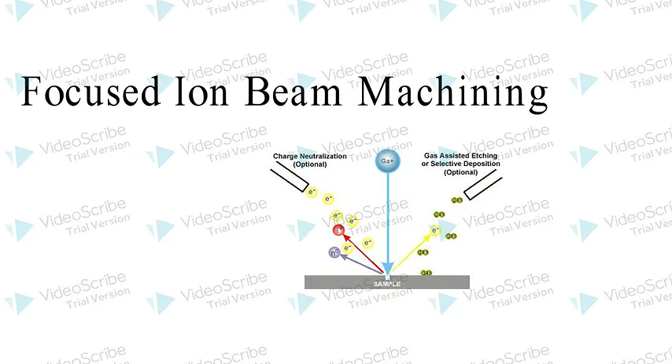This process is also known as ion milling. And why ions? Because they are nothing but atoms having gained or lost an electron, which are much heavier than normal electrons. For example, a hydrogen ion is 1840 times heavier than the electron.

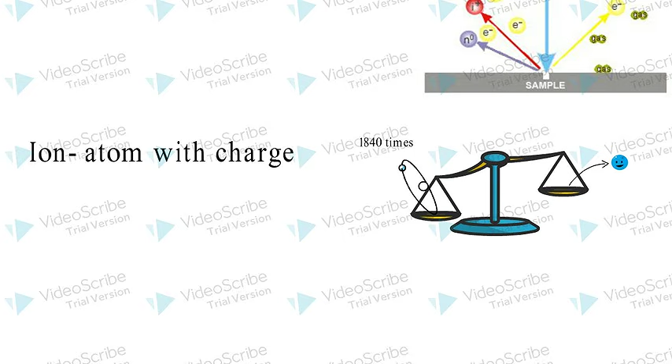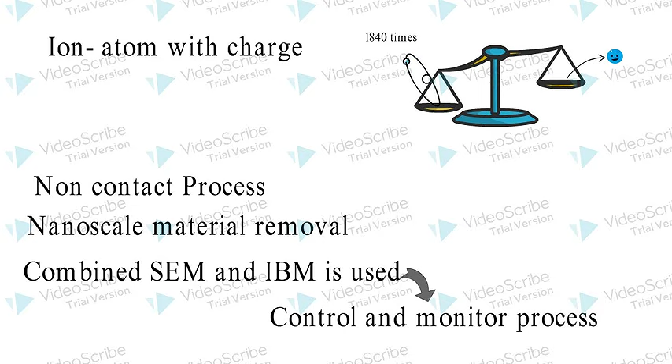So this process offers certain advantages over electron beam machining. This is a non-contact process, so the workpiece is completely stress-free and works better on nano or micro scale, so it's used for micro machining. It is also coupled with scanning electron microscope, that is SEM, which is used for imaging whatever process is going on. So imaging gives you better control over the milling and machining process. Focused ion beam machining is usually used in collaboration with scanning electron microscope.

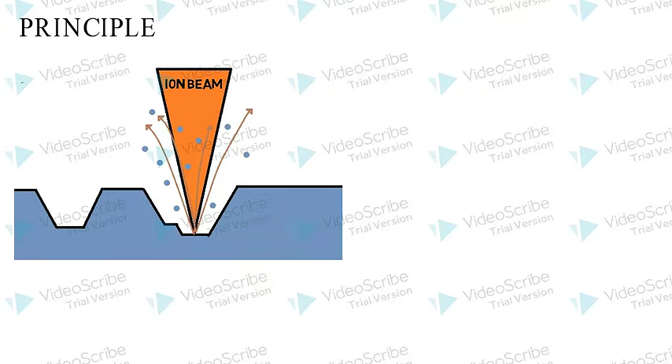Now let's see the basics of focused ion beam machining. This is the ion beam generated from the ion column, which is most of the times gallium plus ions. That is the workpiece, and these represent the atoms which are removed from the workpiece.

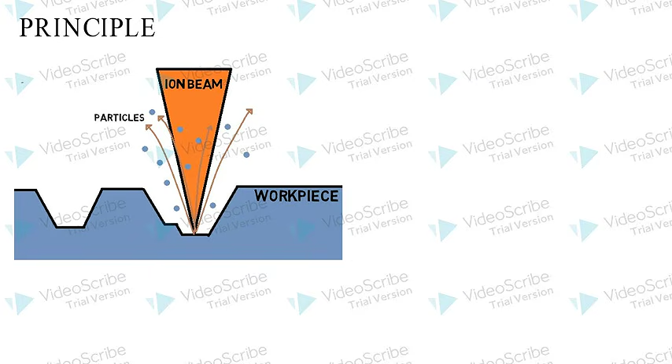So how does this work? There are certain steps involved. The first and foremost of them is surely sputtering. Sputtering can be thought of as a game of pool or a game of marbles. What happens when an ion accelerated with a high velocity hits the work surface? It transfers this kinetic energy to the surface atoms of that workpiece, and if that kinetic energy happens to be greater than the binding energy of that particular atom which it is hitting on the surface of the workpiece, then the kinetic energy counteracts the binding energy and that atom is forced out or emitted from the workpiece. This is nothing but sputtering.

So sputtering contributes to machining in ion beam machining. There is a parameter for this called sputtering yield, which is basically a ratio of mean numbers of emitted atoms to the incident particles which the ion beam contains. That gives us how much incident atoms can generate how many emitted atoms from the workpiece.

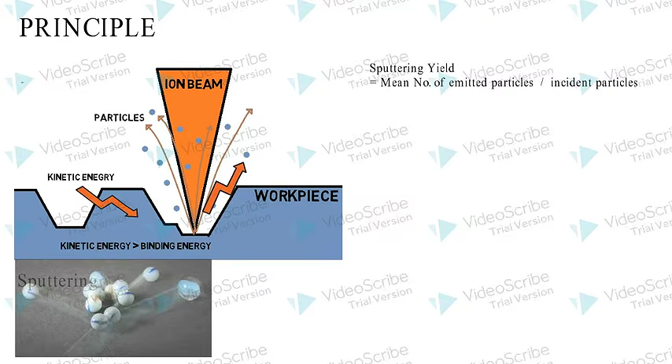Sputtering also gives rise to collision cascade. If an ion incident on the workpiece possesses higher energy, it does not only transfer that to a single atom on the surface, it undergoes a series of collisions inside the target. Each atom which comes in contact with this acquires kinetic energy. If, as in sputtering, this kinetic energy is more than its binding energy, this atom can be emitted out from the workpiece. So collision cascade can emit several atoms at a particular time from the target surface.

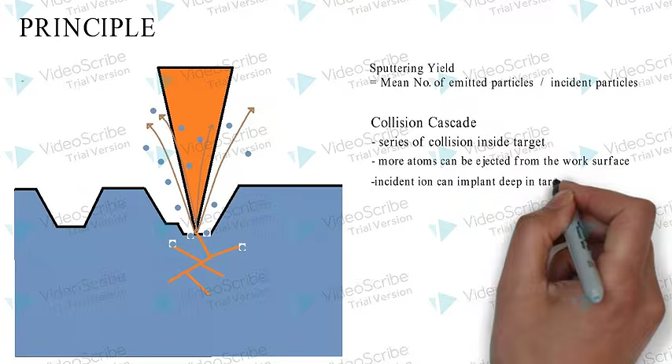Also, the incident ion can get implanted in the surface so that it can damage the crystal lattice of the target surface. The cascading effect can be accelerated by using higher energy incident ions. Cascading effect is accelerated when higher material removal rate is needed from ion milling, and though it causes some surface damage, it still yields higher sputter yield.

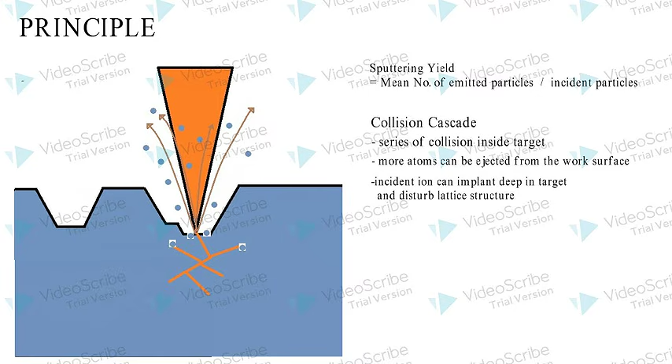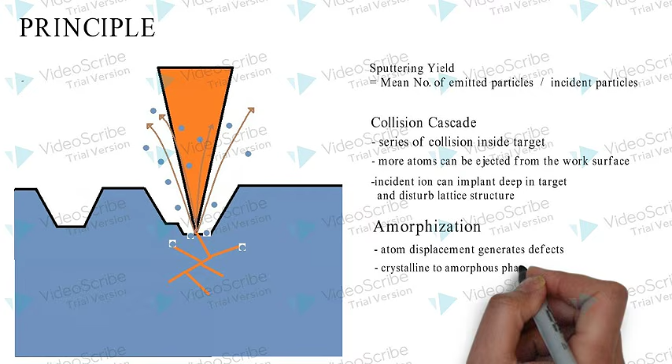As we surely know, one problem gives rise to another. If collision cascade occurs, the ions can get implanted deep in the surface of the workpiece to be machined. This can cause point defects in the crystalline structure of the workpiece, and that causes the crystalline structure of the workpiece to convert into an amorphous structure, which can be harmful at times. The depth of this is very small, 10 to 30 nanometers, but as this is a micro machining process, it affects the outcome.

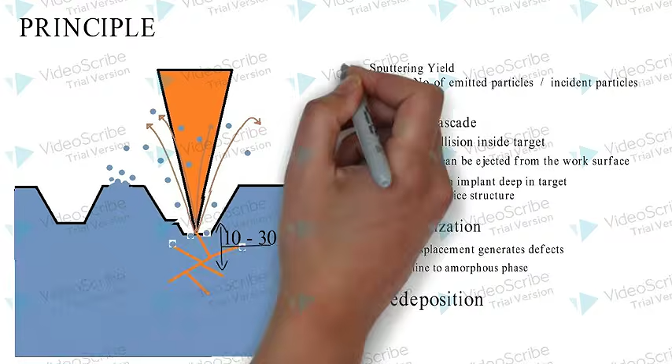There is another phenomenon observed in the ion beam machining process, that is redeposition. As this whole process is occurring in vacuum, the atoms removed by the sputtering process cannot be evacuated by the vacuum system. Sometimes they can get deposited on the adjacent surface where the milling is going on. The redeposited material sometimes settles on the site and adheres to the surface, which means we need to sputter it a second time, which obviously increases your process time and effort. So redeposition is surely an undesirable phenomenon in focused ion beam machining.

Redeposition is observed highly in areas such as holes, trenches, or narrow slots, where the redeposited material is also difficult to evacuate.

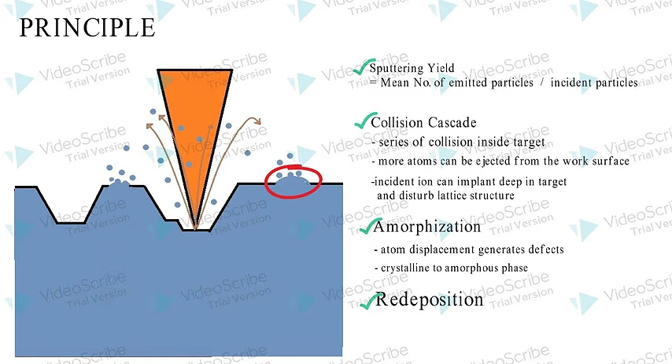Up to now, we have seen sputtering, collision cascade, amorphization, and redeposition. Although there are arguments, redeposition is surely an unwanted phenomenon in focused ion beam machining, so we need to get rid of it. That can be achieved using two methods.

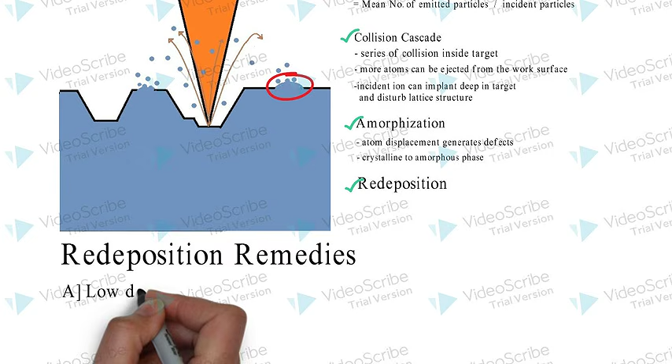The first is low beam current with multiple passes. If the incident ion beam does not have high energy, the collision cascade is minimized and therefore the dislocation of atoms inside the crystalline surface of the workpiece is minimum. But since the material removal rate in this process is very low, we need multiple passes. So lower the beam current, use more passes. That is one way to avoid redeposition.

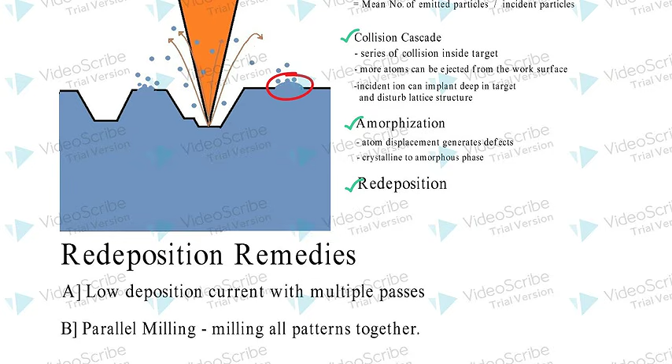The second thing which can be done is parallel milling. Parallel milling is machining multiple patterns at the same time. For example, drilling one hole after another is series milling, while drilling 15 or 10 holes on a particular surface at the same time is called parallel milling. Parallel milling avoids redeposition as all the patterns are machined simultaneously.

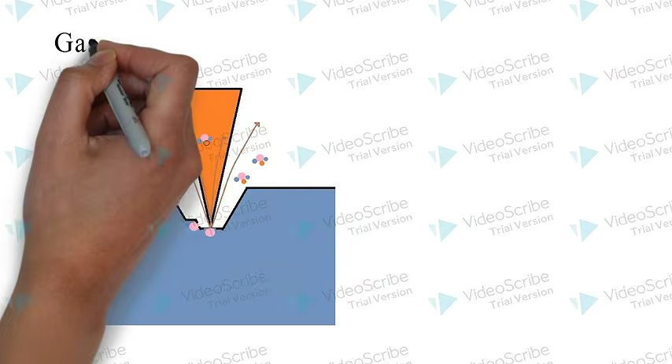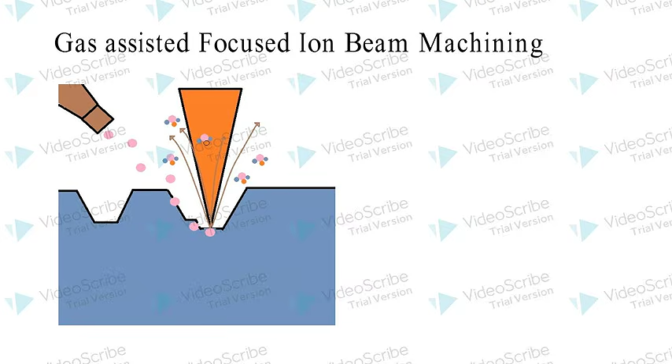To overcome both redeposition and the low material removal rate problem of focused ion beam machining, reactive gas can be introduced at the site of milling. This type of milling is called gas-assisted focused ion beam machining. So there is a GIS, that is gas injection system, in addition to the ion beam and workpiece. This reactive gas is incident on the milling site.

Gas molecules get adsorbed, that is they rest on the surface of the workpiece. When the ion impinges on the surface, the adsorbed gas atoms ionize and chemically react with the substrate surface, which helps the milling process. The compound formed can most of the time be volatile, so it is removed from the workpiece. So reactive gas deposits on the surface, reacts with the ion and the workpiece, and is removed as a volatile material. This solves the problem of redeposition, thereby increasing the accuracy of the machined feature and enhancing the material removal rate.

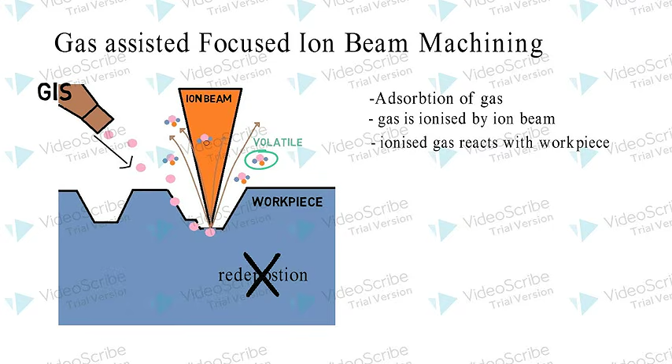So the number of gas molecules or the amount of gas injected at the milling surface is kept optimum, because if the gas is lower in amount, it will generate less sputtering yield, that is low material removal rate. But if there is excess gas, the gas atoms will directly interact with the ions and not the workpiece, so there will be no workpiece atom removal, and again low sputtering yield. So either high or low amount of gas results in low material removal rate.

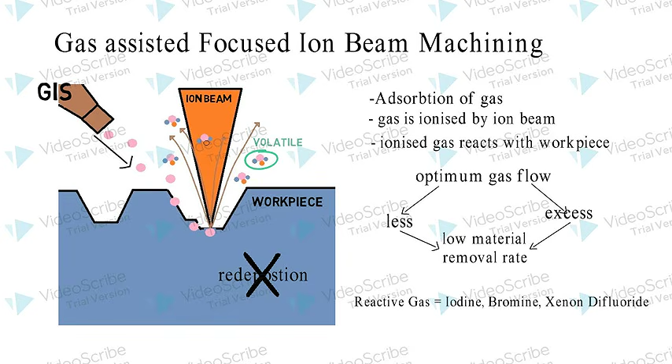Selection of a suitable gas is done based on whatever workpiece or target material we are using in this process. Generally, halogen-based compounds are used as reactive gases, such as iodine, bromine, or xenon difluoride. These are some examples of commonly used gases.

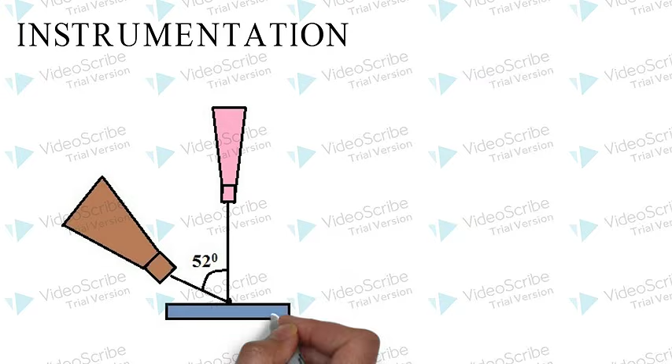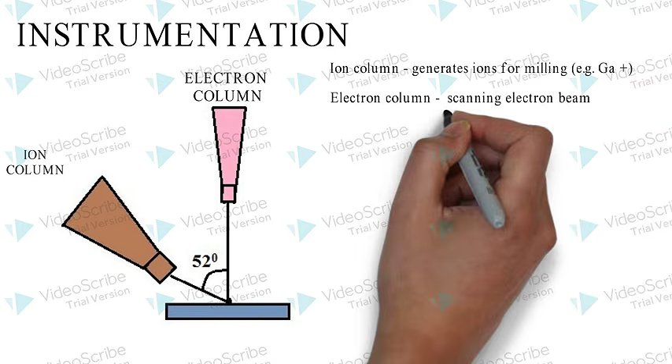Let's move on to the instrumentation of focused ion beam machining. Commercial dual beam platforms incorporate both a focused ion beam column and a scanning electron microscope column, in which the ion beam column is used to generate the ion beam for machining the substrate or workpiece, and the electron column generates a beam of electrons which can be scanned over the workpiece to get in situ real-time images for observing the FIB process at the target zone.

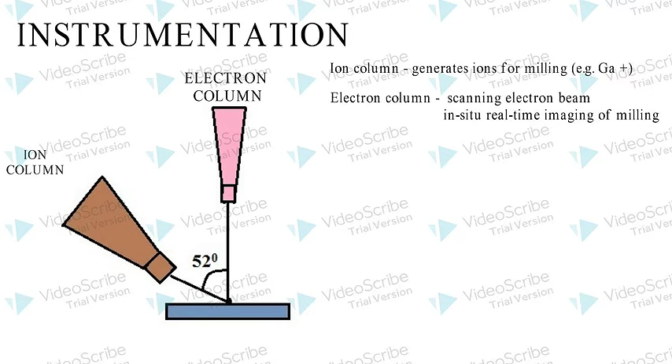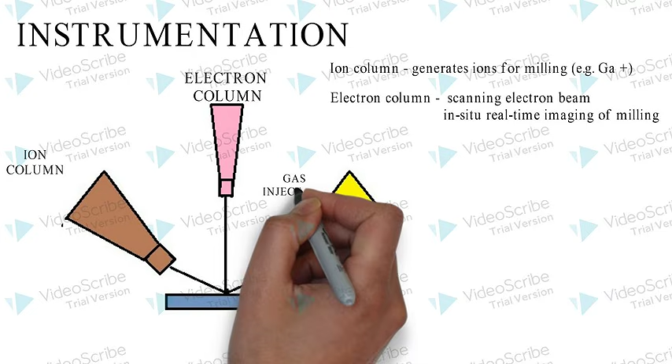Typically, the ion column is tilted at 52 degrees to the electron column so that the real-time image can be seen on the computer screen. In case of gas-assisted FIB machining, there is another nozzle in the setup, which is from the GIS, that is gas injection system.

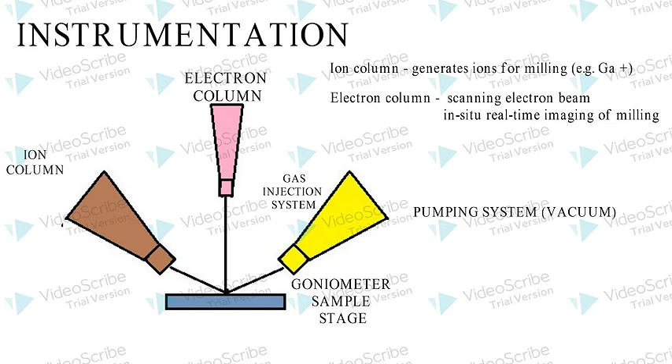The instrumentation also includes a goniometer sample stage, that is the stage at which the substrate or workpiece is held, and a pumping system for creating vacuum conditions, which is favorable for both electron beam and ion beam. So there are five total aspects: ion column, electron column, gas injection system, goniometer sample stage, and pumping system.

From the liquid metal ion source, the ions are field evaporated and forced to travel downwards. The next important part is the mass selector. It is a setup that allows only the required number of ions with a fixed mass-charge ratio to pass through it for the machining process.

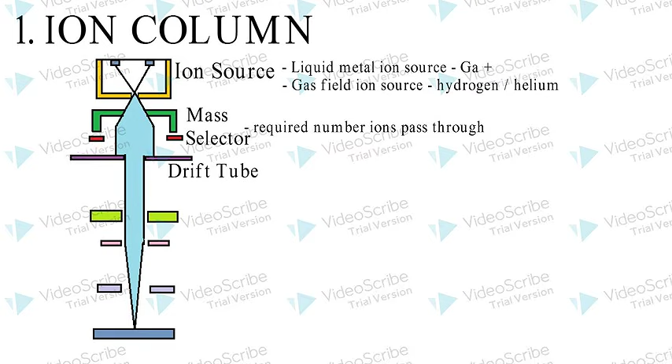Then there is an aperture or a drift tube which allows only the atoms which are traveling in a vertical direction. Then there is a set of lenses, out of which the condenser lens controls the diameter of the ion beam, that is, it can increase and decrease the size or circumference of the ion beam.

Objective lens are useful for focusing the ion beam at a single point at the sample. Sputtering occurs when these ion beams strike the sample surface.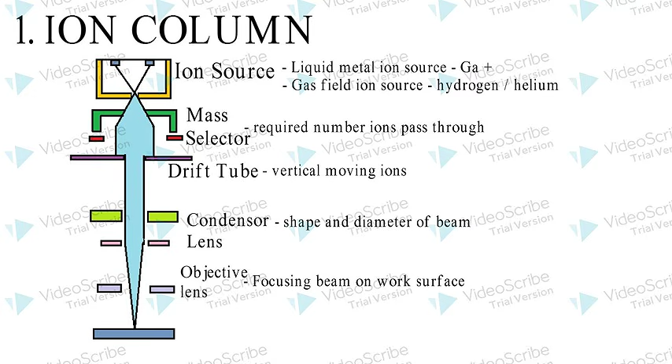Electron column is similar to ion column, also called the SEM column. The source of electron beam is kept at the top of the column, which emits electrons, and they are accelerated towards the sample. Electromagnetic lenses are used to focus this beam of electrons on the sample.

When a beam of electrons strikes the sample, the surface emits secondary electrons, and these secondary electrons can be detected using detectors which are capable of converting this electronic signal into an image.

Electron column is discussed in detail in the video on scanning electron microscope or electron microscope. So please refer to that.

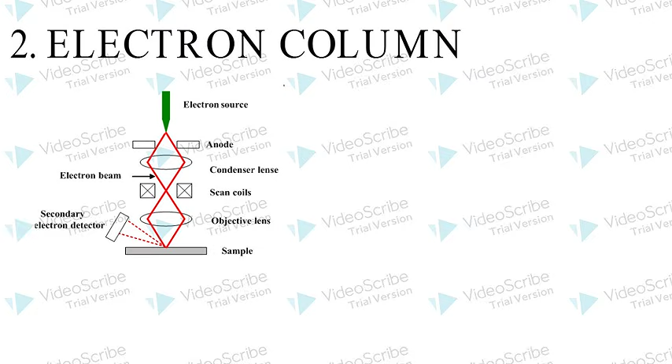Gas injection system allows introducing small quantities of reactive gas near the target surface. For controlling the flow of gas, it usually has a tungsten needle with a reservoir containing precursor material.

The goniometer sample stage, that is the stage at which the workpiece is held, can provide three-dimensional motion in x, y, and z axis, and it can rotate around its own axis. Also, it can tilt the sample by 60 degrees if required.

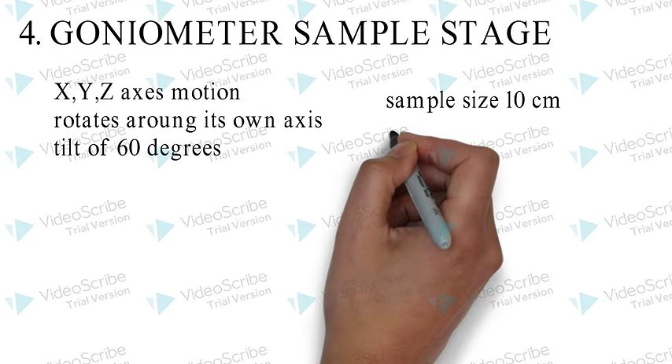This is a standard stage which is used in many machining processes. It can handle sizes up to approximately 10 centimeters, depending upon the chamber size. The position of the sample stage is controlled by an optical encoder with high precision.

The pumping system mostly contains a vacuum pump which is used to create and maintain ultra high vacuum conditions, which is required for both the ion column and electron column to work properly.

Now, to govern the process of machining, we must learn about the factors which affect the machining characteristics of focused ion beam milling process. The following equation gives the material removal rate in terms of different parameters, in which Y is the sputter yield, I is the probe current, A is the area to be etched.

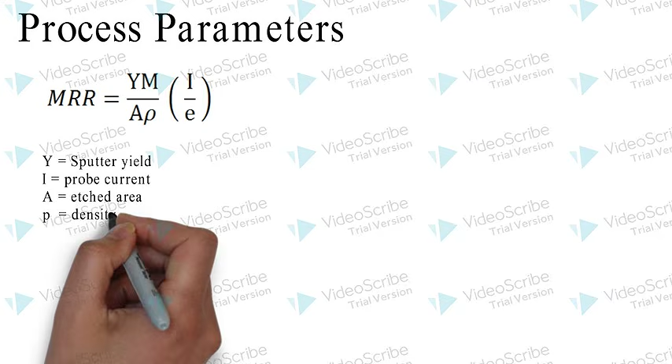Rho is the density of the target material or the workpiece, M is the atomic mass of the target material, and E is the charge emitted.

So all these parameters contribute to the final quality of machining. This can be summarized as four input parameters. First is workpiece material.

As material removal rate depends upon density and atomic mass, the nature of the workpiece material affects the machining characteristics greatly.

Second is angle of incidence, because sputtering yield depends upon ion incident angle. Increasing this angle increases the number of incident ion-atom interactions, which results in an increase in sputtering yield.

But it cannot be kept at 90 degrees because there is a higher probability of collision between the incident ions and the sputtered-out ions interacting with each other, so the ion may not reach the work surface when it is kept at 90 degrees. Therefore, the range is kept at 75 to 80 degrees, at which we get the maximum sputtering yield.

Next is ion energy. The sputtering process occurs when there is transfer of kinetic energy from incident ions to the workpiece atoms, so this energy must be kept above the binding energy of the atoms of the workpiece material.